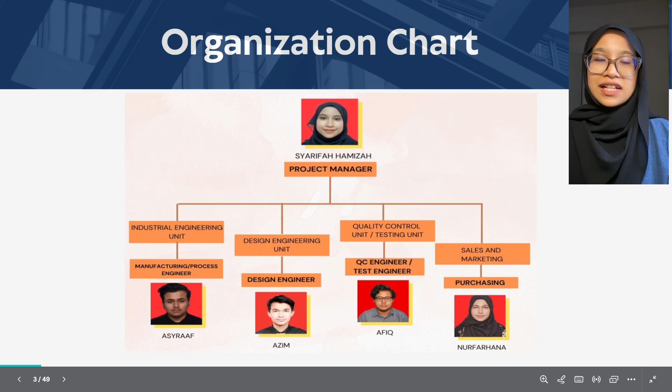This is our organization chart. As you can see, I'm Syarifah Hamizah as project manager, and my team are Asyraaf as industrial engineering unit, that is manufacturing or process engineer; Azim as design engineering unit, that is design engineer; Afiq as quality control unit or testing unit, that is QC engineer and test engineer; and lastly, Nurfarhana as sales and marketing unit and purchasing.

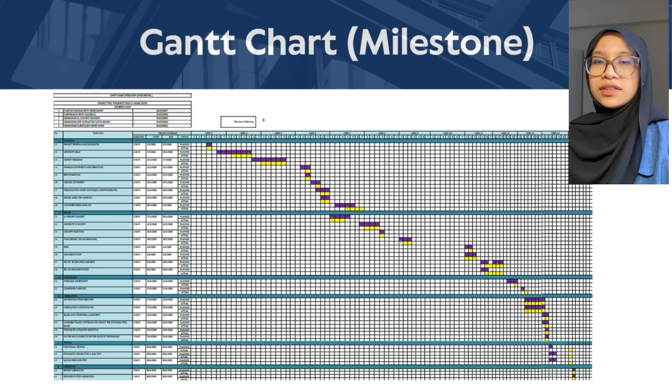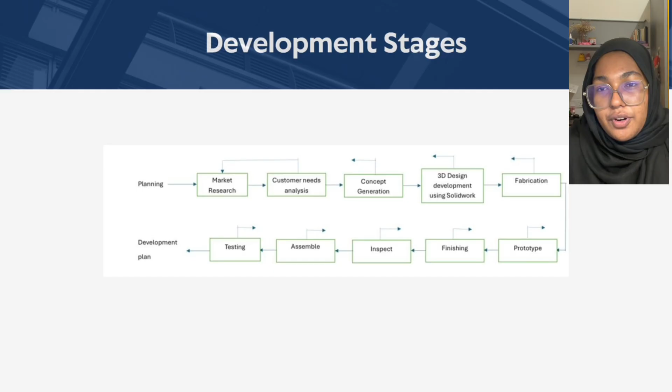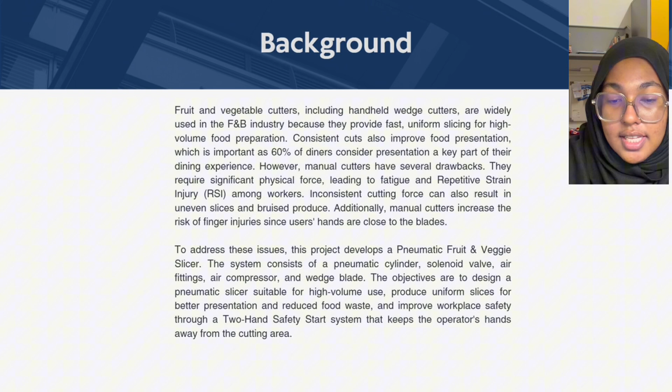To address this issue, our team developed a pneumatic fruit and veggie slicer. The system uses pneumatic cylinders, solenoid valve, air fitting, an air compressor, and a wedge blade. This background sets the stage for our project, showing why innovation in slicing technology is necessary and how our pneumatic system provides a safer, more efficient solution.

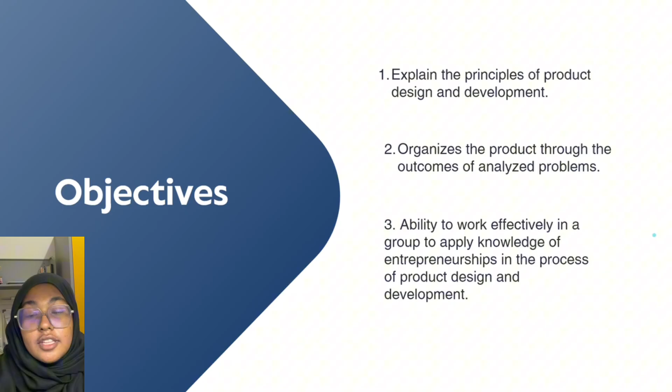Our objectives are to explain the principle of product design and development, to organize the product through the outcome of analyzed problems, and the ability to work effectively in a group to apply knowledge of entrepreneurship in the process of product design and development.

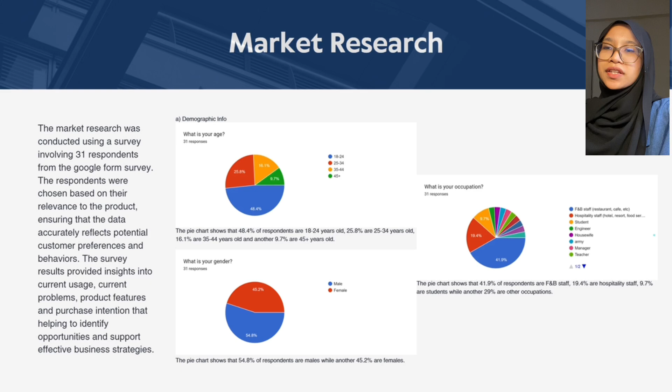As you can see here, this is the demographic info segment. The second one is the current usage segment. The third one is the current problem statement. Next, the product features segment, and lastly, the purchase intention.

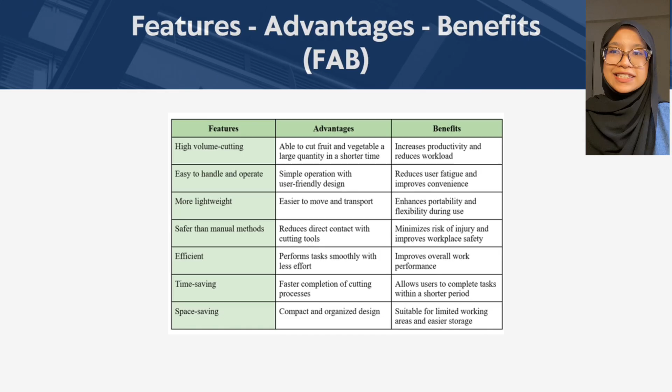And lastly, space saving. The advantage is compact and organized design. The benefit is suitability for limited working areas and easier storage.

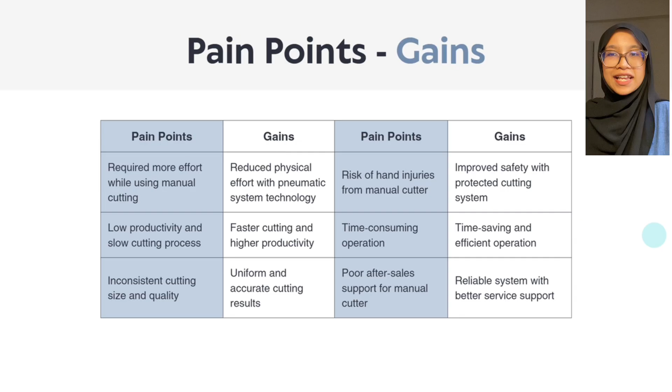And lastly, poor after-sales support for manual cutters. The gain is a reliable system with better service.

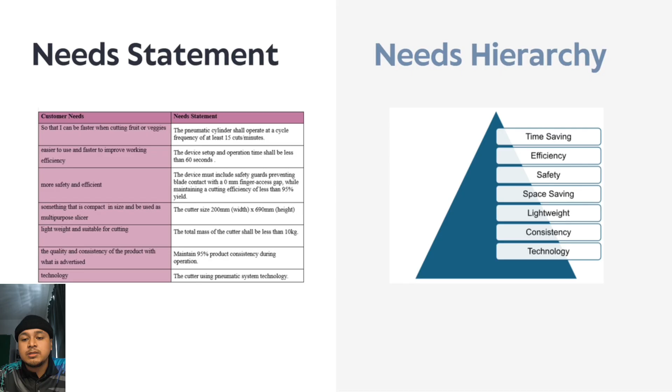This is supported by safety, space saving and lightweight structure. At the foundation, ensuring everything functions reliably and consistently, using the technology.

So, how do we bridge the gap between what the customer wants and what we actually put out? We do this using a classic systems engineering tool, the house of quality. This matrix allows us to cross-reference our prioritized customer requirements on the left against our actionable engineering characteristics at the top.

To do this, we establish relationship strength. A solid black circle represents a strong relationship, valued at 9 points. A square represents an average relationship, valued at 3 points. And an open double circle represents a weak relationship, valued at 1 point.

By mapping these relationships, we can calculate the raw score and relative weight for each of our engineering parameters. If we look at the bottom rows of the matrix, the results yield a very clear path: cylinder bore size and air pressure type take the rank 1 position, each commanding a relative weight of 25.9%.

This is incredibly logical. The cylinder bore directly determines the force of the cut, while the air pressure controls the cycle speed. Together they dictate both the time saving and efficiency of our machine.

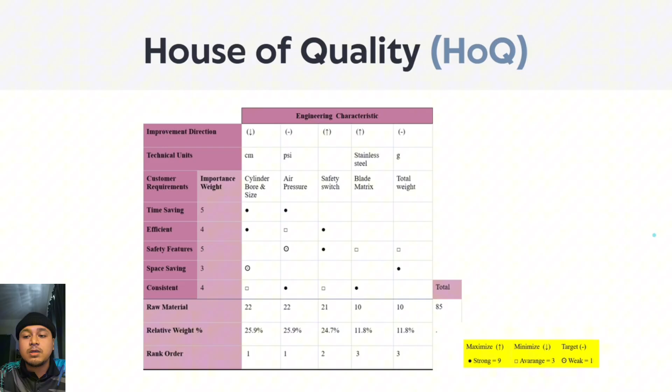In total, this house of quality ensures that over 50% of our engineering focus concentrates precisely on optimizing the pneumatic cylinder system, directly delivering the speed and power our customers are asking for.

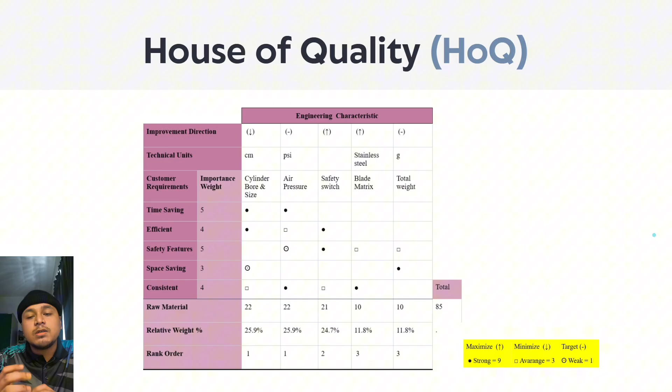Having established our needs statements and hierarchy, we needed to validate this assumption mathematically. This brings us to the next slide, representing an important ranking, where we look at our quantitative importance ranking.

So for the first, time saving and safety features tied for the absolute highest priority, both achieving a maximum score of 5 out of 5. This tells us that if our device is fast but unsafe, or safe but slow, it will fail in the marketplace. These two parameters are non-negotiable.

Following closely behind are efficiency and consistency, which tied with a strong score of 4 out of 5. Our users expect a professional grade slice every single time they pull the pneumatic lever.

Space saving ranked as the lowest priority of the five with a score of 3 out of 5, while portability is still a great value. Users are willing to sacrifice a slightly larger countertop footprint if it means they get a machine that is fast, safe, and consistent.

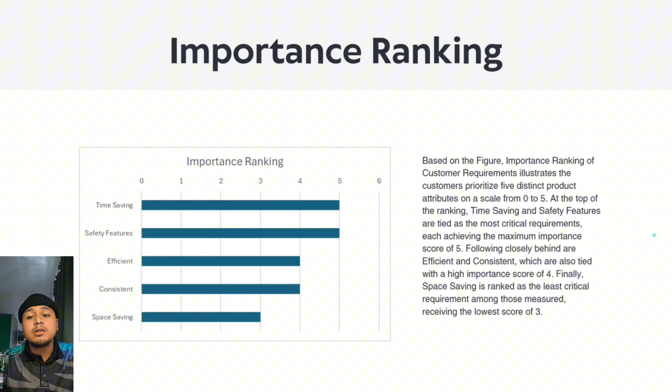Understanding this exact breakdown allowed us to make highly informed design trade-offs in the next phase of our development.

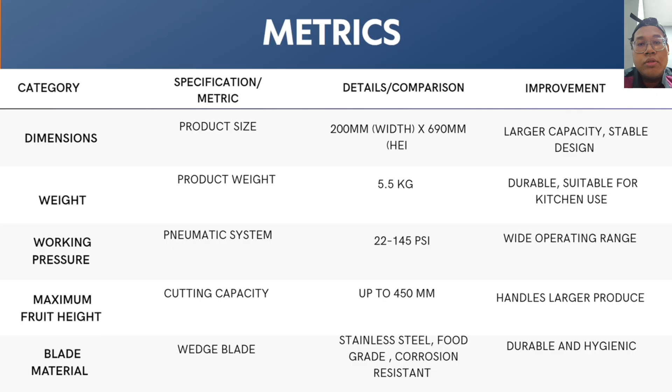The pneumatic system operates within a working pressure of 22 to 145 psi, giving it a wide operation range for different cutting requirements. Our slicer can handle fruit and vegetables up to 450 mm in height, allowing larger produce to be processed. Finally, the wedge blade is made from food-grade stainless steel, which provides excellent corrosion resistance, durability, and hygiene.

This slide focuses on the performance improvement compared to manual cutting. Our slicer completes one cutting cycle in approximately 3 to 5 seconds, whereas manual cutting usually takes around 10 to 15 seconds, making it 60% faster.

This results in approximately 3 times higher productivity, producing around 720 slices per hour compared to only 240 slices per hour manually. The pneumatic system also minimizes the physical force required, reducing wrist and shoulder strain while producing consistent speed and uniform slices.

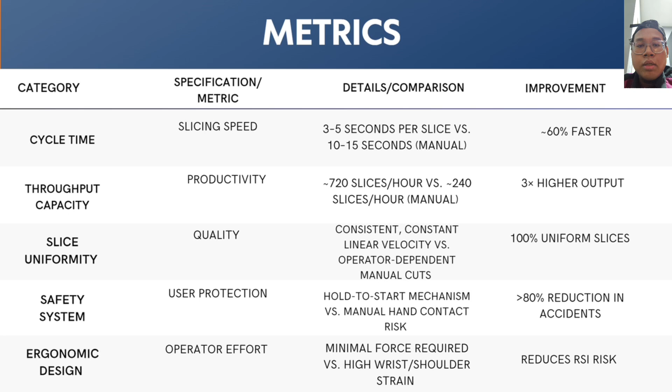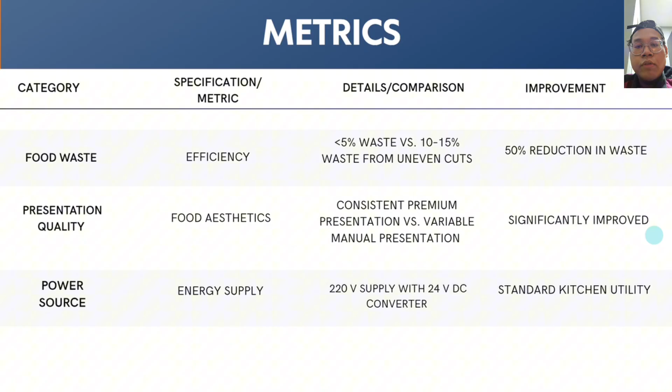Because every slice is uniform, the overall food presentation is significantly improved, which is especially important in commercial kitchens.

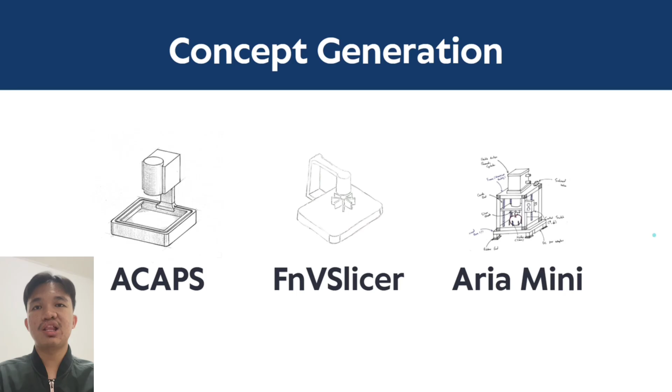Next is the phase where a concept will be selected. To select the concept, we use the Pugh method, which emphasizes several criteria such as cutting efficiency, ease of use, safety, material quality, portability, and costing.

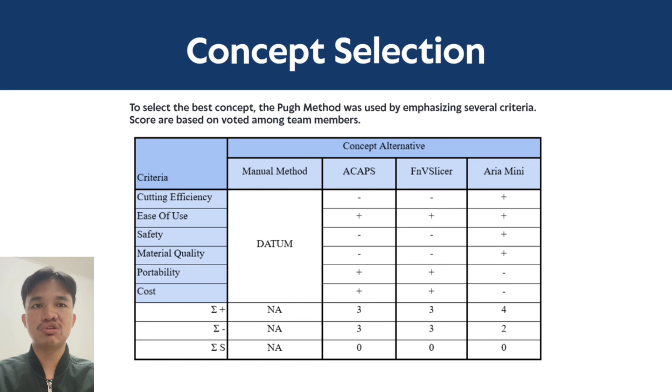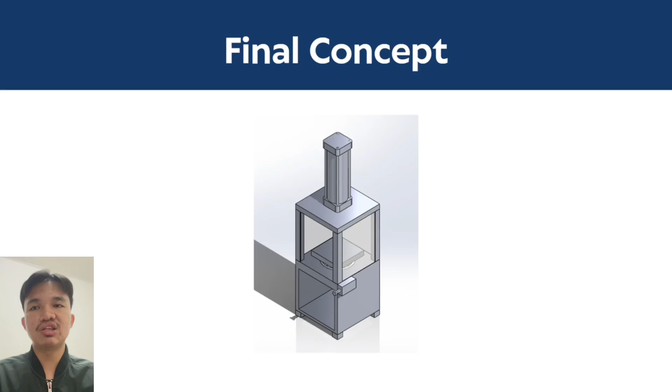The scores were given based on discussion among group members. Based on the Pugh method, Aria Mini received a higher score. Therefore, this concept will be improved based on customer needs and preferences.

Next, the bill of material. The parts used are divided into 2 categories: standard parts that we purchase from suppliers, and custom parts, which are part numbers starting with PAS-0X, that we manufacture by ourselves.

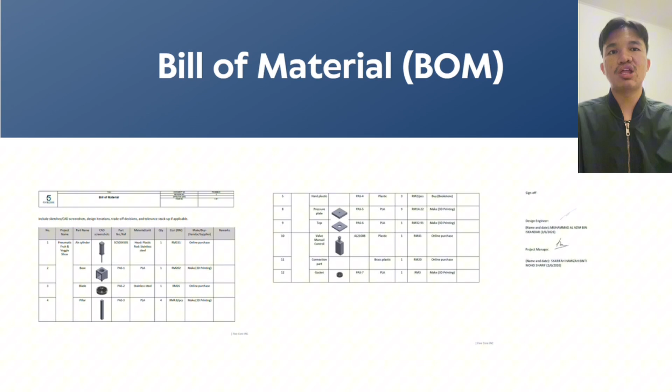Last part, CTQ. This is a critical part and requires high precision. Several characteristics have been identified, such as force of pneumatic, top hole diameter, pressure plate hole diameter, and diameter of blade base.

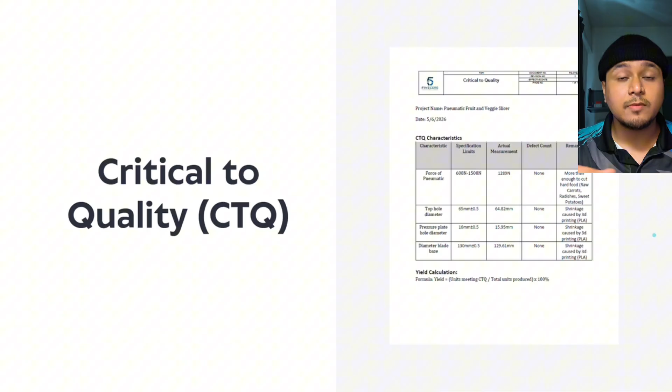Alright, prototype. Now that we have established our engineering specification, let's transition into how we brought this concept to life. I'm a little bit excited to present this section.

The Aria Mini is a semi-automatic tabletop kitchen device that applies engineering to slice fruit and vegetables quickly, safely, and uniformly in commercial settings like a busy cafe, bartenders, or juice bars, like the barista section. Manual slicing causes operator fatigue, strain, and highly inconsistent yields.

To solve this, the Aria Mini utilized a high-performance double-acting pneumatic cylinder to drive the mechanical cutting action. The food is placed into a custom 3D printed PLA base that houses a razor-sharp stainless steel blade matrix.

Now, to classify our build, this is an alpha prototype. It is a physical working model built specifically to prove our core mechanics in real life. Because this is an early stage engineering model, we fabricated the frame out of 3D printed PLA plastic rather than final production materials like industrial stainless steel.

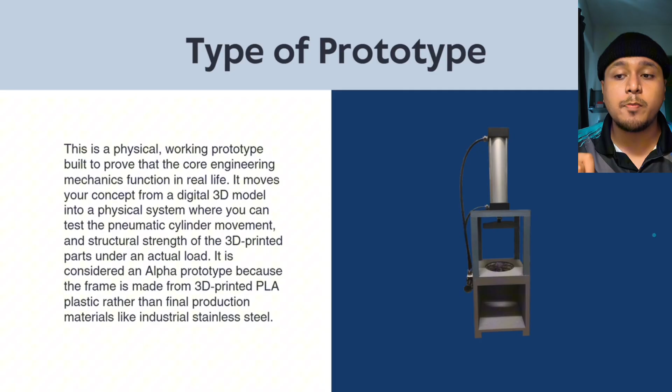We also intentionally left an open side chamber. This open configuration was critical for our engineering evaluation, allowing us to monitor tolerance under actual loads and make immediate real-time mechanical adjustments.

Process flow. This section, creating a functional prototype, requires a highly disciplined multi-step engineering workflow. Let's look at the process flow we followed to transition from pixel to physical parts. Our development process was structured into 4 distinct, highly technical phases: design and CAD modeling, component sourcing and procurement, additive manufacturing, and post processing and quality check.

For number 1, design and CAD modeling, we began in SolidWorks, translating our concept sketches into a comprehensive 3D CAD model. This stage allowed us to generate exact engineering drawings and run initial geometric evaluation based on our target customer needs.

Second, component sourcing and procurement. Not everything can or should be custom made. We carefully selected and sourced critical specialized components online, ensuring all pneumatic actuation loop parts and our circle wedge cutter matrix met our exact structure and fluid power requirements.

Third, additive manufacturing. For fabrication, we leverage fused deposition modeling, or FDM 3D printing, utilizing PLA filament. We successfully printed our primary structure frame components, including the robust base, shelf, vertical guides, pillars, and the top head enclosure.

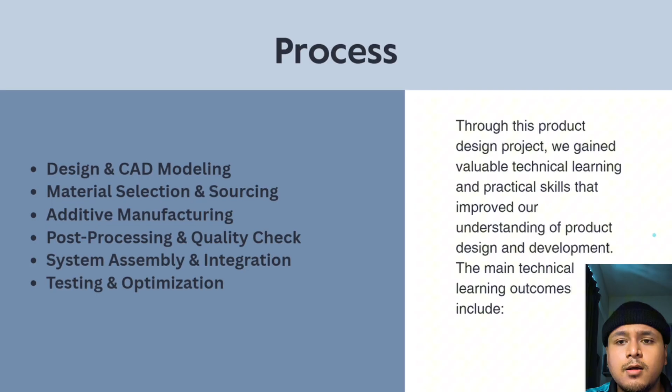Testing, evaluation, and design optimization. We conducted functional performance testing using a compressor to evaluate the cylinder operation, strength, and thrust capability under structural load, and successfully optimized the design by adding a custom mounting gasket to resolve a minor scaling discrepancy.

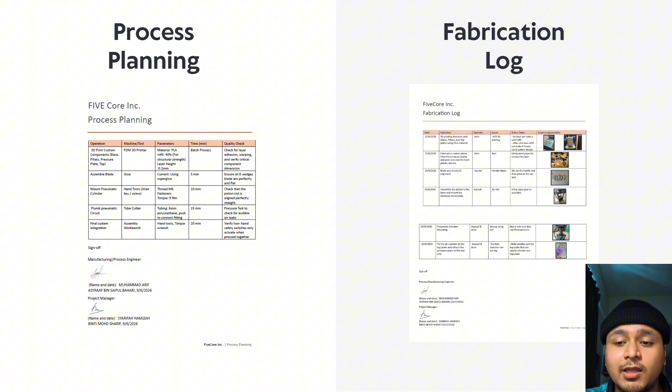Overall, this project strengthened our technical competency and provided practical experience in designing, developing, and improving a functional product while considering both user requirements and engineering constraints.

Before conducting performance testing, we carried out an inspection of the complete prototype. During the inspection, we checked the frame alignment, pneumatic cylinder installation, blade positioning, air hose connection, and all mechanical fasteners. Every component was verified to ensure proper installation and safe operation before testing began, reducing the potential for failure during the testing stage.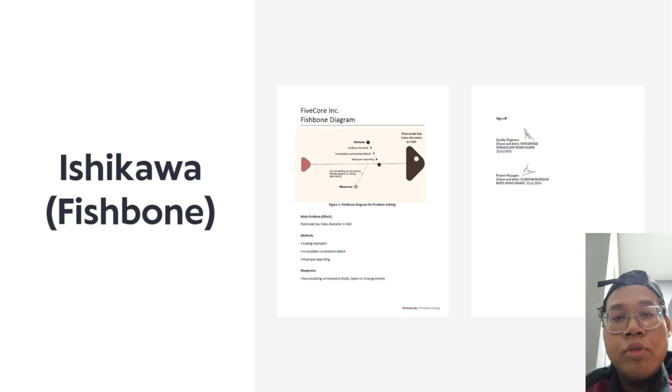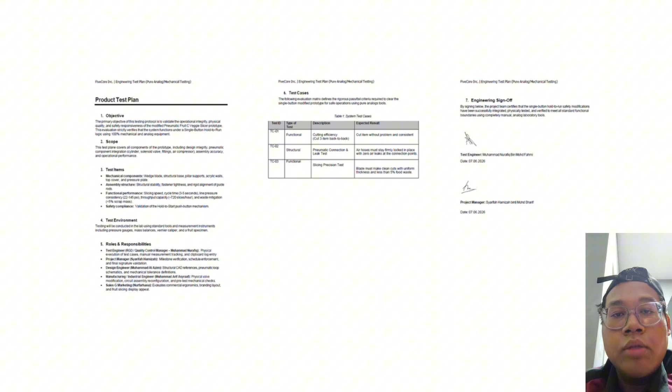After completing fabrication and inspection, we carried out several tests to evaluate the performance of our product. The objective of these tests was to verify that the pneumatic system operates correctly, ensure there is no leak, evaluate the cutting position, and confirm that the product meets the design specifications established earlier. The following slide presents the testing method, result, and discussion.

This slide summarizes the testing procedure and the corresponding result. First, we performed TC-01, the functional test. We verified that the pneumatic cylinder can move the blade smoothly in both upward and downward directions using an air compressor.

Next, TC-02 was the leak test, where we inspected all the air hoses and fittings. The result confirmed there was no significant air pressure leakage, indicating that the pneumatic system was properly sealed.

Finally, TC-03 was the precision test. We measured the slice thickness and food waste using a vernier caliper. The results showed that the slicer consistently produced uniform slices with minimal waste.

In addition, force analysis showed that the SC63 pneumatic cylinder generated approximately 1,289 Newton force at 60 psi, exceeding the estimated 1,000 Newton required to cut hard vegetables such as carrot.

We also found that placing the blade at the base allowed gravity to stabilize the product, producing cleaner cuts while preventing bruising, especially for softer fruit like tomatoes.

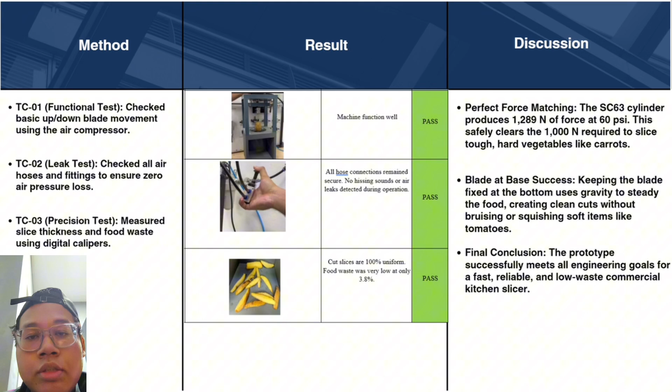Overall, the testing demonstrates that our prototype successfully achieved the project objective of providing a fast, reliable, safe, and low-waste solution for commercial food preparation.

So I will explain the cost and time analysis of our project. For the machine, the estimated cost during the printing process was 66 ringgit 33 cents. This is only for the pillar, 4 pieces, pressure plate, and top.

The actual cost is 268 ringgit 33 cents, giving a variance of 202.

So for the labor cost, we calculate based on the salary of the CEO, project manager, industrial engineer, design engineer, quality control engineer, and sales and marketing.

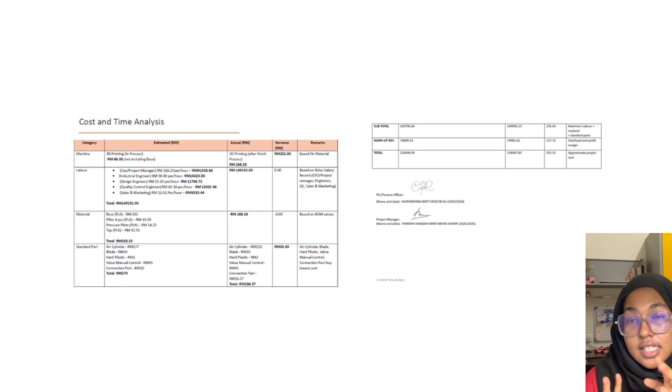Overall, we worked about 68 days. One day equals 8 hours of work, giving a total of 544 hours. The total labor cost was...

149,192 ringgit, which matched the estimate exactly.

For the material costs, such as PLA for the base, pillar, pressure plate, and top, the total was 268 ringgit 33 cents, consistent with the bill of materials.

For the standard parts, like the air cylinder, blade, plastic, valve, and connection parts, the estimated cost is 270, and the actual cost was lower at 236 ringgit 57 cents, so we got a saving of...

RM33.43. So the subtotal combining machine, labor, material, and standard part was about RM149,965, with a variance of...

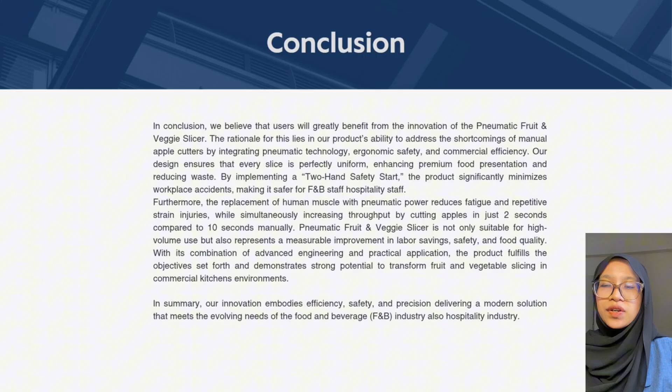In summary, our innovation embodies efficiency, safety, and precision, delivering a modern solution that meets the evolving needs of the food and beverage industry, as well as the hospitality industry.